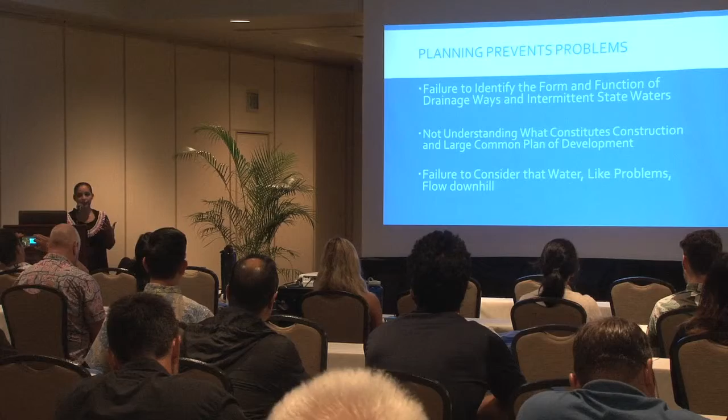And this is something that has not only been occurring here on Oahu, but it's also been observed on the neighbor islands as well. And because of it, it has resulted in enforcement actions being issued. And these enforcement actions included hefty penalties, lots of ordered corrective actions. There were also community concerns where private citizen suits were also filed. So what it really comes down to is failing to have a plan.

The three issues that I want to discuss today: the first one has to deal with failing to identify drainage ways or state waters in the planning phase of your project prior to even requesting an NPDES permit. The second one I want to discuss has to do with large common plan of development. I know a lot of people struggle with understanding this, so I hope to be able to explain this a little better and provide you some examples.

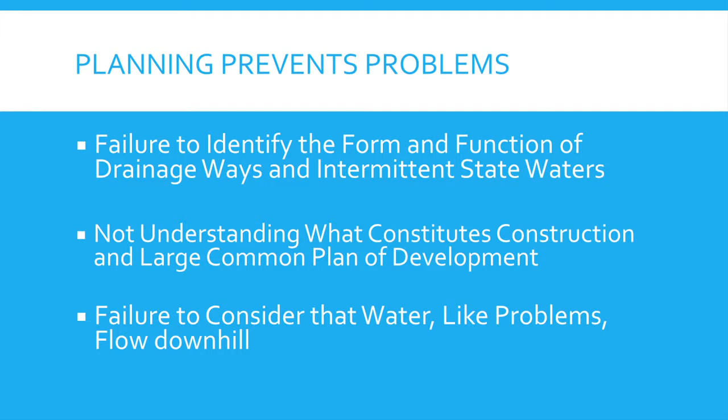And then the last issue that I wanted to bring up has to do with clarifying what we're talking about when we mean construction activities and what we mean when we say earth disturbances. The example that I will be using throughout this presentation failed to address all three of these issues. However, as I already mentioned, this is not an isolated event. This has been occurring throughout the state, which is why I thought it was most important to provide it to you today so that you can make sure that it doesn't affect your construction site.

This example is of a construction project. It's located on the windward side of Oahu in the Olomana area, which is located between Kailua and Waimanalo. So right off the bat, you're dealing with an area that's particularly wet, subject to rainy weather. It is situated on the mountainside upstream of Ka'elepulu wetland, which is home to endangered Hawaiian birds. So right there, you know that there's a community involvement.

The project entails development of a residential subdivision of 23 lots that are ranging in size, for a total disturbed area calculated to be just over 49 acres. The project involves grading of lots, installation of infrastructure such as the roadways and driveways, as well as a private drain system. The developer who pulled the NGPC for this project anticipated getting it done in 3 phases. And home construction of the individual lots is not a part of this project.

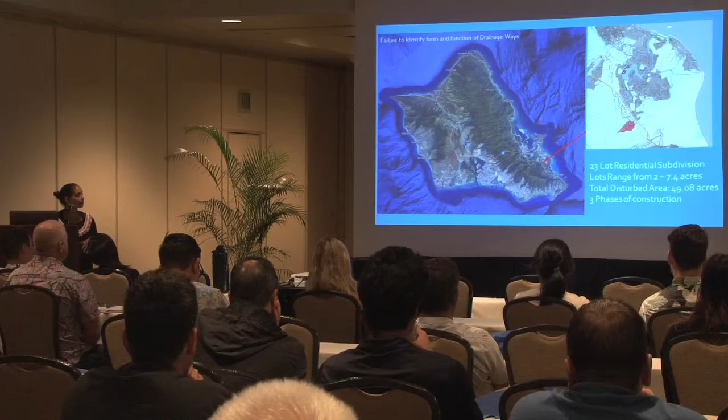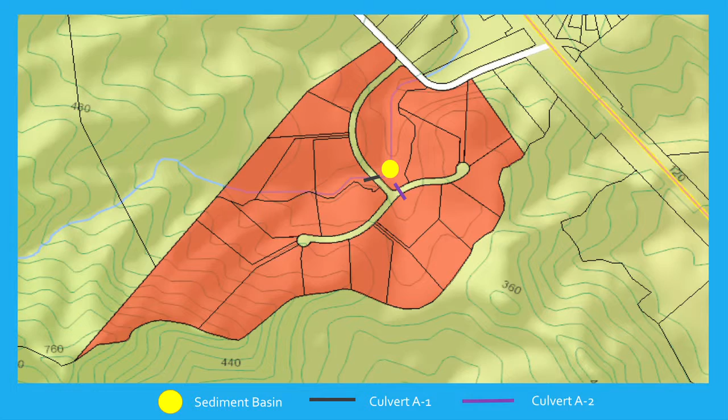Taking a closer look at the project, you can see that there is a stream that transects the site. The project relies solely on a sediment basin as their BMP for retention and treatment of stormwater runoff from the site. But believe it or not, the basin was constructed in the state water. So the curb drain inlets that were built along the roadways go into culvert A-2, which is identified in purple here. So all of the site runoff goes through culvert A-2 before entering the basin for retention and treatment.

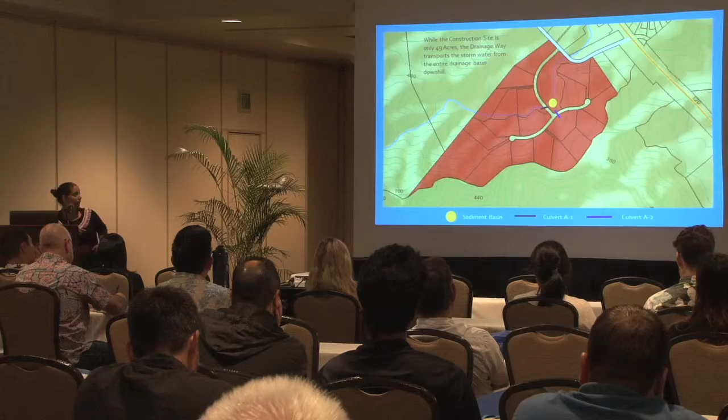Culvert A-1 here in black was constructed in line with the unnamed intermittent stream. So it was concluded that the basin is essentially in the unnamed intermittent stream that is a part of the Ka'elepulu stream system. In addition to the basin being constructed in a state water, the basin was also not sized appropriately. The civil engineers who designed the basin depended on the project area for a 2-year, 24-hour storm event.

However, since it wasn't identified that it was in a drainage way, we all know how gravity works. Water's always going to flow downhill. So therefore, the basin should have been sized to accommodate water from the entire drainage way and not just the project.

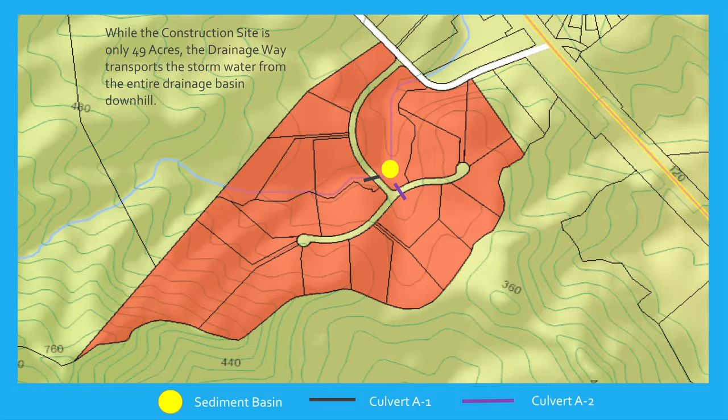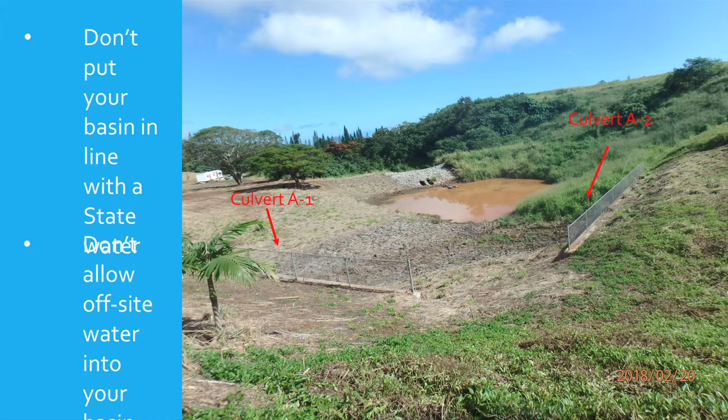Some information regarding basins, besides the fact that they shouldn't be constructed in state waters, is that whether they're planned to be temporary or permanent, they should not be your only BMP. You need to implement erosion and sediment control on the upward parts of your sites to improve the efficiency of your basins. And then some Appendix C requirements: the slopes of your basins need to be stabilized. Otherwise, they're just going to contribute pollutants.

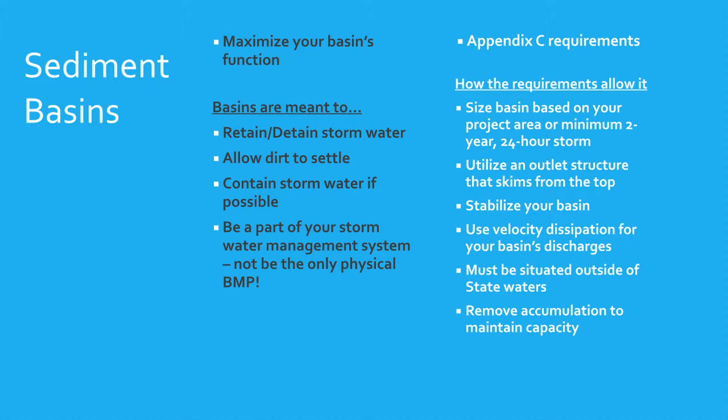And also, your basins need to be maintained. All of the accumulated sediment needs to be dredged or removed in order to maintain the capacity of the basins. So I hope this works, but this is a video that was taken at the site of a rain event. Now, this is not a Tropical Storm Olivia, Hurricane Lane type of event. This is just normal rainfall that occurs at the site on any given day.

So the darker brown color is what is coming from... something happened. Should I try it again? This darker brown is coming from culvert A1, which is the one that's in line with the stream. And let's see if it works. It's going to commingle with the lighter brown, which is what is coming off of the site through culvert A-2. And it's entering the basin.

And of course, this video doesn't work because it worked in the office, but it's not going to work here.

What it didn't show was the next few seconds of the basin is just overflowing, and then it's just going straight out the outfall. There's no time for retention. It has no time for treatment. Therefore, making the basin just capacity wasn't enough.

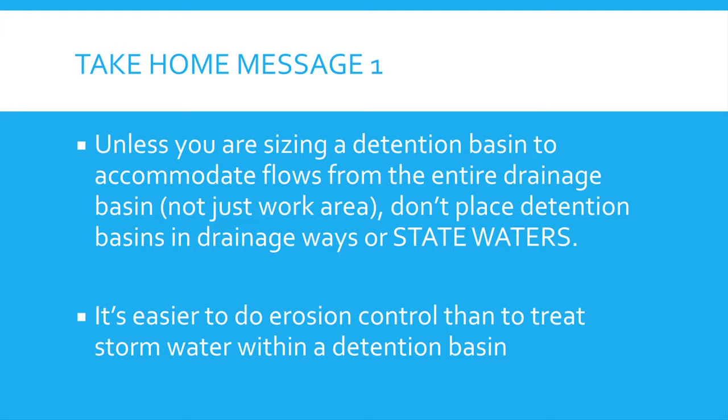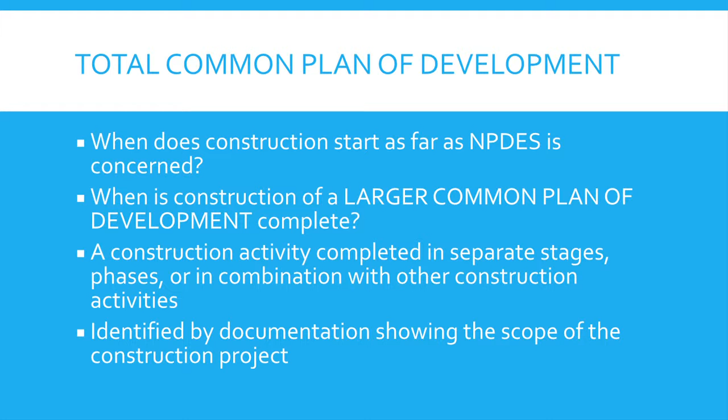So I'm going to transition next into the Total Common Plan of Development, also known as a larger Common Plan of Development. What that basically means is if your construction activity involves smaller projects that are a part of a larger development that will collectively disturb one or more acre. So going back to our example of Olomana, although this construction project was anticipated to be done in phases, even if any of those phases were less than 1 acre, because it is a part of a Total Common Plan of Development, it would all need to be NPDES permitted.

It doesn't really matter if the developer or the permittee wants to capture the phases all under one permit or if they wanted to have it under separate permits. Main thing is that it's all covered. Now, if you remember for this project, home construction was not identified on the permit application. However, when they sell the lots and the homeowner decides to do construction on their home, if they're gonna disturb 1 or more acre, then they would also need to obtain an NPDES permit as well.

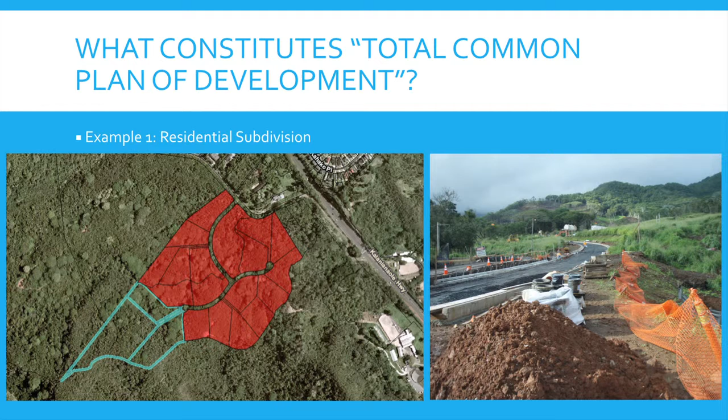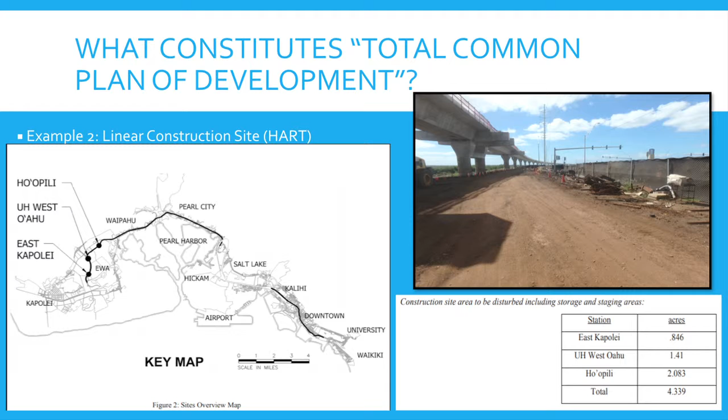The next example has to do with a linear construction project. We should all be familiar right now with the rail. Since the total linear miles of the area disturbed is greater than 1 acre, an NPDES permit is required. HART chooses to separate their stations and guideways into separate permits, which once again, it's fine as long as it's all permitted. DOH doesn't really care. But I know DOH would prefer to have it under 1 permit since it would make our lives a little easier. But at the end of the day, main thing is permitted.

And the take-home message for this is just to ensure that you have permit coverage for all parts of your construction. And then also do not submit your notice of cessation to close your NPDES permit until all of your construction activities that were included in your NOI or your application are complete.

We're doing really good on time, folks.

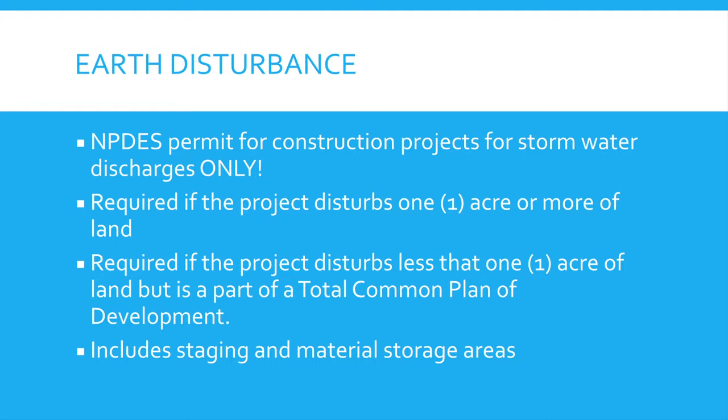The last issue has to do with discussing or clarifying earth disturbances. Most of you already know that DOH issues permits for discharge of stormwater associated with construction activities that are 1 acre or more, or if it's a part of a total common plan of development. But most people only think of earth disturbance as grubbing or grading. However, clearing of vegetation is also considered an earth disturbance.

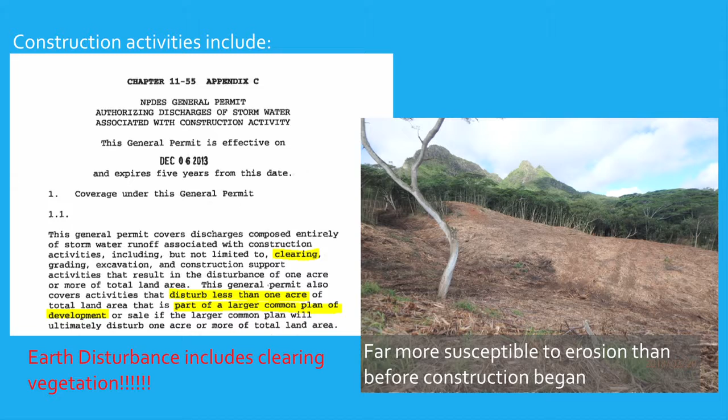This is another video that's probably not gonna work, but we'll try it anyways. This is the discharge that was occurring from this area that was just cleared. Once again, the roots were still intact. And this was the source of that lighter brown water that we've seen in the previous video. And just keep in mind, there are also no erosion or sediment control BMPs implemented at the site.

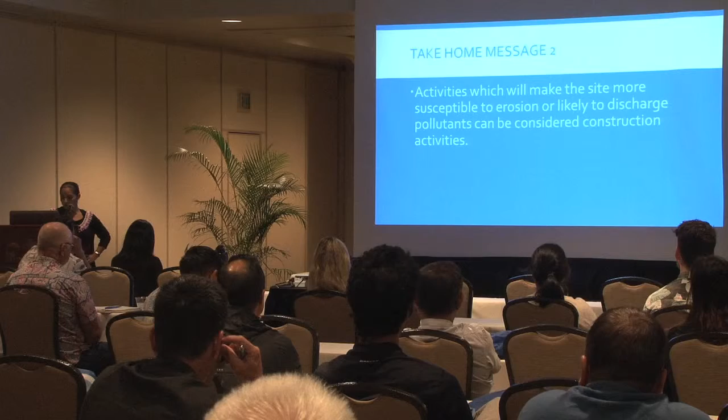So this cleared area was over 1 acre, but even if it was less than 1 acre, because it is a part of a total common plan of development, an NPDES permit is still required. And the take-home message for this is that activities that will make your area susceptible to erosion, which includes clearing of vegetation, not only just grubbing and grading, need to be NPDES permitted.

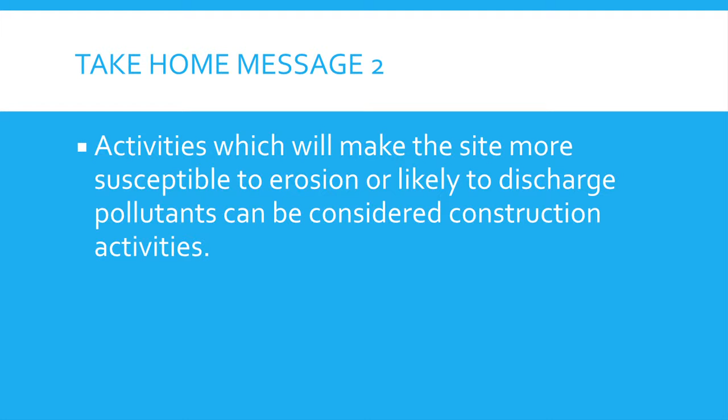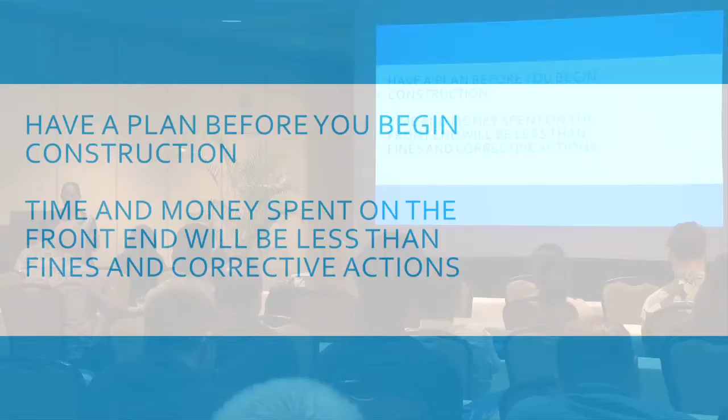And the most important thing to take away from all of this is to just make sure that you have a plan. Planning prevents problems. You want to stay ahead of the curve, otherwise you will forever be behind. And it'll take less time and money planning on the front end than being stuck in an enforcement action with DOH. You'll be dealing with penalties, you'll be dealing with corrective actions, you'll be dealing with me, and you don't want to do that. So all jokes aside, please just make sure that you have a plan so that this doesn't affect your construction site.